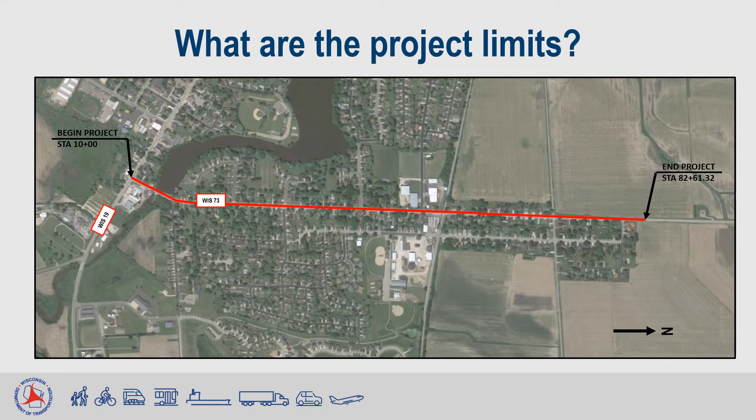Why do we need this project? One need is deteriorating pavement. The existing pavement on Wisconsin 73 is experiencing significant rutting and alligator cracking in portions of the wheel path.

Rutting is typically a result of unstable subgrade or insufficient subbase material. This pavement deterioration causes increased maintenance costs, poor ride quality, and presents safety concerns.

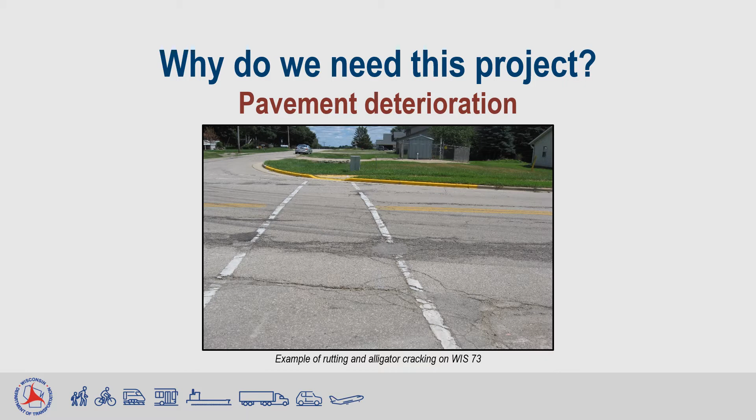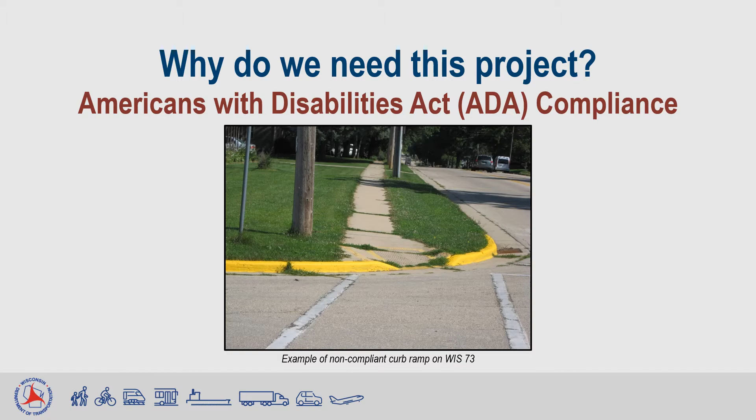In addition to the roadway, all the existing curb ramps along Wisconsin 73 are not compliant with current Americans with Disabilities Act standards.

The existing bridge and sidewalk approaches at structure B-13-73 over the Maunesha River are sinking, creating poor ride quality and safety issues for pedestrians. The existing bridge railing is chipping and peeling.

The existing curb on the bridge deck shows signs of deterioration with spalling concrete and exposed rebar. There is surface delamination on the abutments. These deficiencies are costly to maintain.

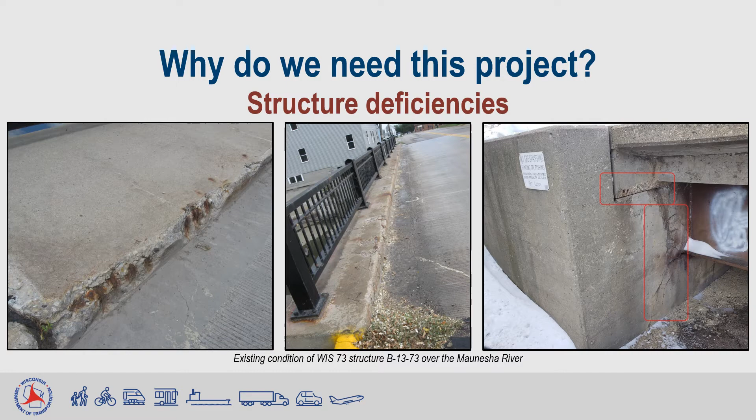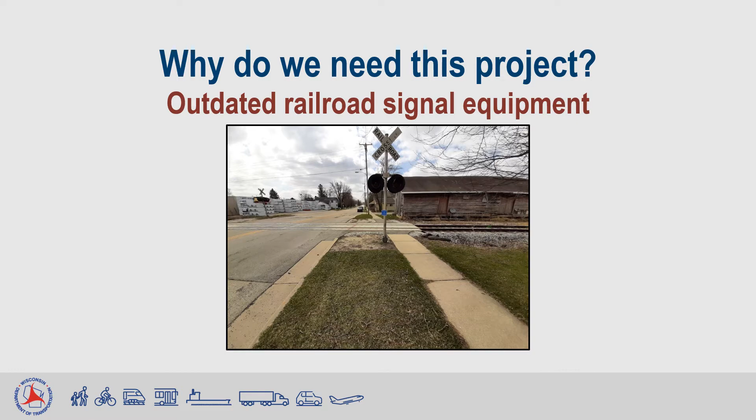In addition, the existing railroad signals at the at-grade Wisconsin and Southern Railroad crossing just north of Friedel Drive are not functioning to the latest standards.

What are the proposed improvements? The next collection of slides explain the proposed improvements and show the typical sections of Wisconsin 73.

To address the safety concerns and pavement deterioration, the proposed construction on Wisconsin 73 would consist of removing the existing top 4 to 5 inches of asphalt pavement and replacing it with 5 inches of new asphalt pavement.

The proposed construction would also include select areas of excavation below subgrade, or EBS, to address underlying poor soils that cause pavement rutting. The limits for paving would be the existing curb and gutter in the urban section, which would remain in place.

There would be new shoulder aggregate placed in the rural section north of Canal Road. New pavement markings would be installed for roadway centerline and bicycle accommodations.

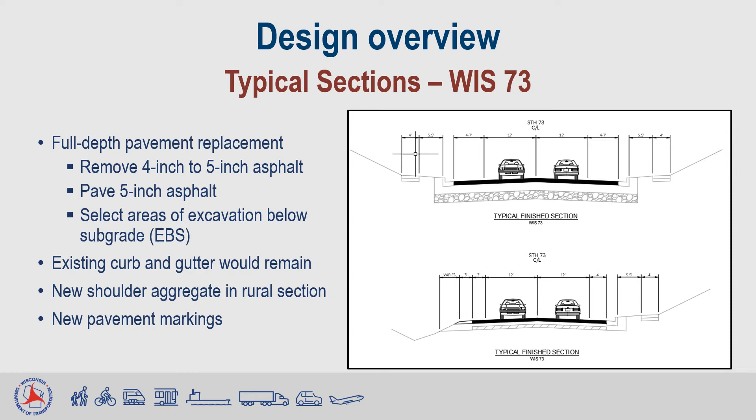The existing curb ramps would be removed and improved to meet current Americans with Disabilities Act standards to the maximum extent possible. Some crosswalks would be reconfigured to cross the roadway in a safer location.

Temporary limited easements and/or small areas of fee acquisition would be required for the curb ramp construction.

The proposed structural improvements for the bridge over the Maunesha River, structure number B-13-73, would include installation of new concrete approach slabs, curb repair, spot surface repair on abutments, and painting the railing.

A bridge deck scan will be completed closer to construction to determine if any deck repair is needed.

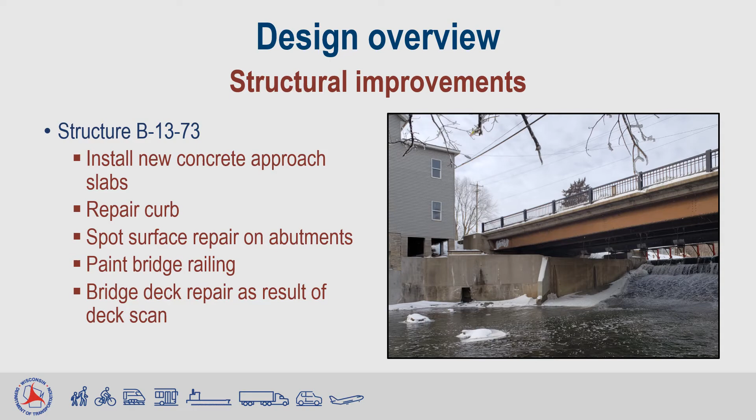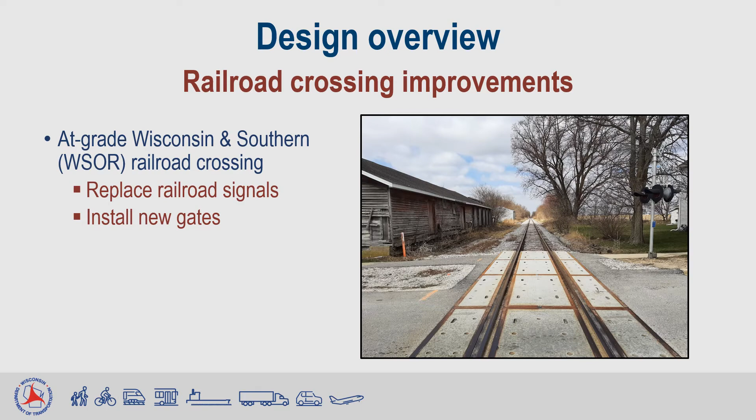The proposed improvements at the at-grade Wisconsin and Southern Railroad crossing just north of Friedel Drive include replacing the railroad signals and installing new gates.

Wisconsin 73 property impacts: right-of-way would be needed at the curb ramp locations to blend the slopes and provide room for contractors to work, not the entire project. Most right-of-way needs would include temporary limited easements, with some spot locations requiring minimal permanent right-of-way to maintain the curb ramps.

The proposed curb ramp construction in front of the Marshall Lions Park would require a temporary limited easement to provide room for the contractor to place their forms and blend the slopes. The curb ramp improvements would not adversely affect the park.

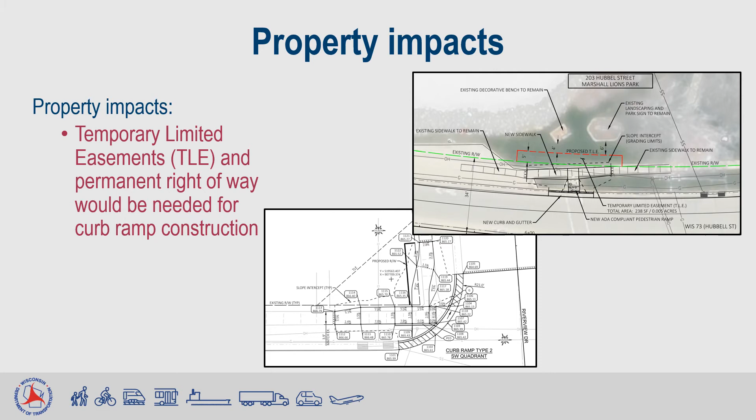What will happen to Wisconsin 73 traffic during construction? The anticipated construction is currently scheduled to begin in 2025. Wisconsin 73 traffic would follow a detour route during construction.

The reason for the detour route is that the existing road is too narrow for flagging operations with the anticipated depth of excavation. This means during construction, Wisconsin 73 would be closed to through traffic but would remain open for local and business access.

The proposed detour route would use Wisconsin 19 and Wisconsin 89 for both northbound and southbound traffic. Local and emergency access on Wisconsin 73 would be maintained during construction.

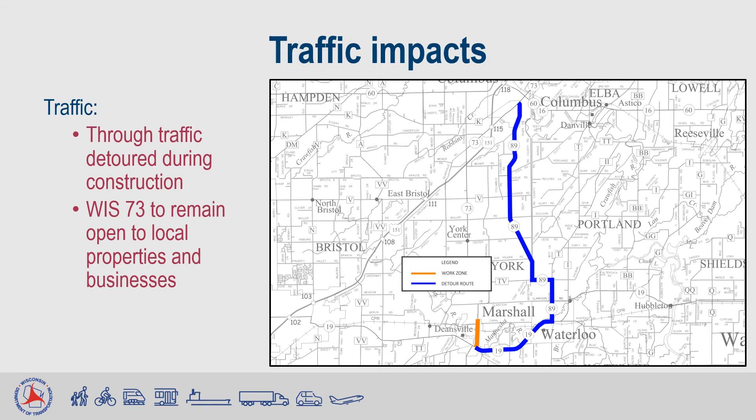What activities have been completed thus far for the project? In 2020, the survey was started and notice to Native American tribes was sent in December. In 2021, project activities have included field investigations, coordination with the Wisconsin Department of Natural Resources, and initiating the Archaeological and Historical Resources Coordination.

The environmental report was started for the project. A virtual meeting with local officials was held on October 5, 2021, to inform them of the project and receive input on the proposed construction activities.

What is next? The current project schedule is outlined here. As mentioned, work on the environmental report has begun, and the report is anticipated to be signed this fall. The preliminary structure plan and structure survey report will be submitted for review in December this year.

The design study report is expected to be approved in March 2022, and following that, the plat is anticipated to be recorded in April 2022, initiating the real estate acquisition process.

After that, the project plans will be sent to the utilities. The plans are currently scheduled to be finalized by May 2024, and construction is anticipated to begin in the spring of 2025.